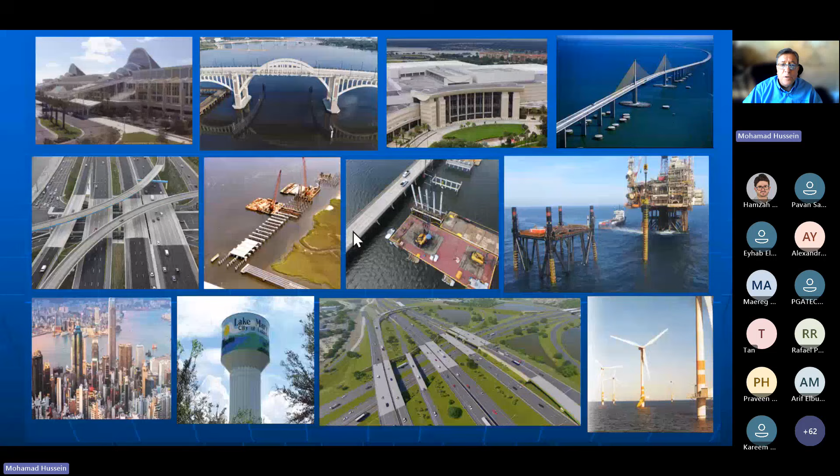Deep foundations are used to support all types of structures and all kinds of geotechnical conditions, for a variety of reasons, to resist all types of load combinations. They can be divided in a variety of ways.

I will divide them today into driven piles, and there is a manual from the United States government that can be downloaded in 3 volumes in PDF format. This manual for the design and construction of driven pile foundations was actually written by engineers from my company, GRL Engineers. This is a website where it can be downloaded from. At the end of the presentation, I will give you my email address, so if you are interested, please email me and I will send you a link to download this manual.

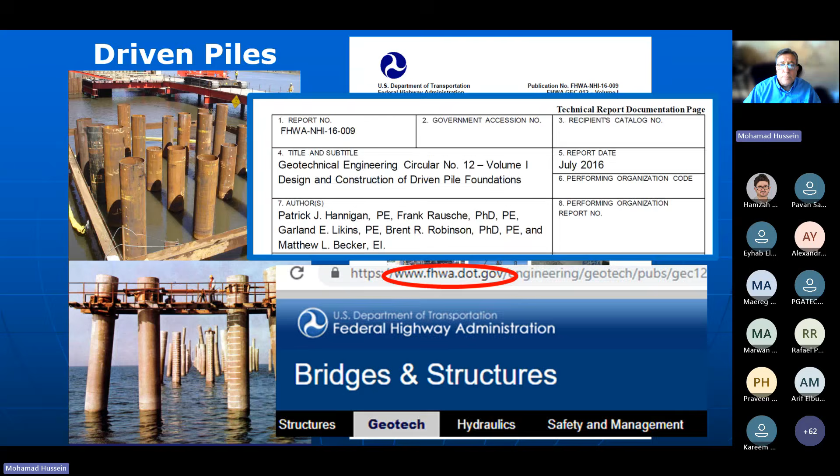I will also talk about bored piles, for which there is also a manual from the United States government you can similarly download. And I will also mention Auger-Cast in-place deep foundation piles, for which there is also a manual of design and construction.

Deep foundations have been used for a long, long time, particularly driven piles, which were mentioned by the ancient Greek historian Herodotus 2,500 years ago. We now have buildings and structures that are hundreds of years old founded on foundations still using the same piles. In today's practice though, those piles were, by the way, timber piles for thousands of years.

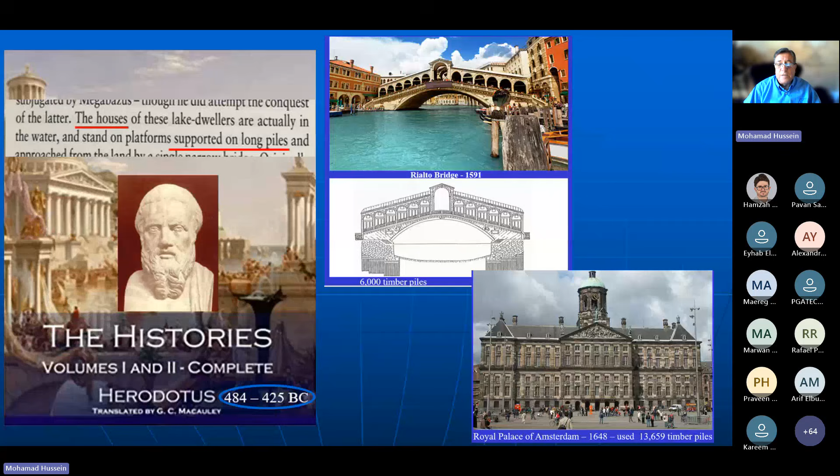In today's practice, driven piles consist of steel piles and concrete piles. And there are literally hundreds of different hammer models that are used to install these driven piles.

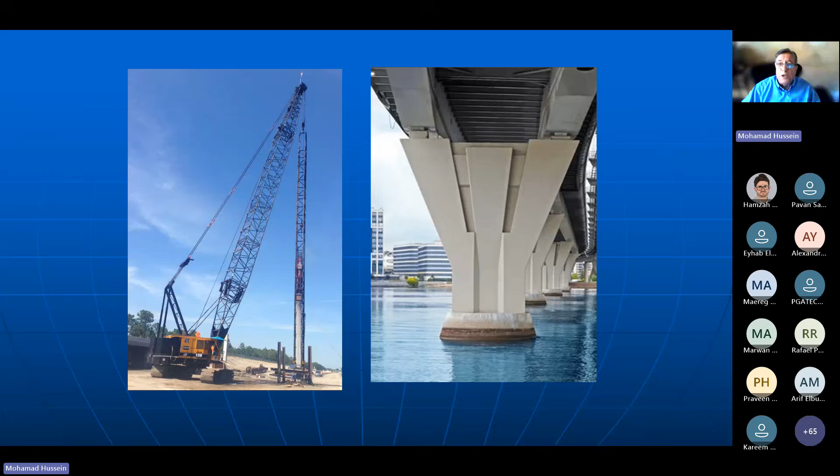So we drive piles individually, typically in a pile group, to form a deep foundation to support a bridge pier or a building.

During the driving, the pile encounters dynamic pile driving resistance. However, to support a building or structure, we need to know its static load-bearing capacity.

The best way to evaluate a pile's static load-bearing capacity is to perform a static load test, for which we need to pile up dead weight as a reaction for a hydraulic jack that we put on top of the pile and load it.

We plot the applied load and corresponding movement of the pile top, incremental load and corresponding incremental displacement, to establish this relationship between pile top loading and pile top movement.

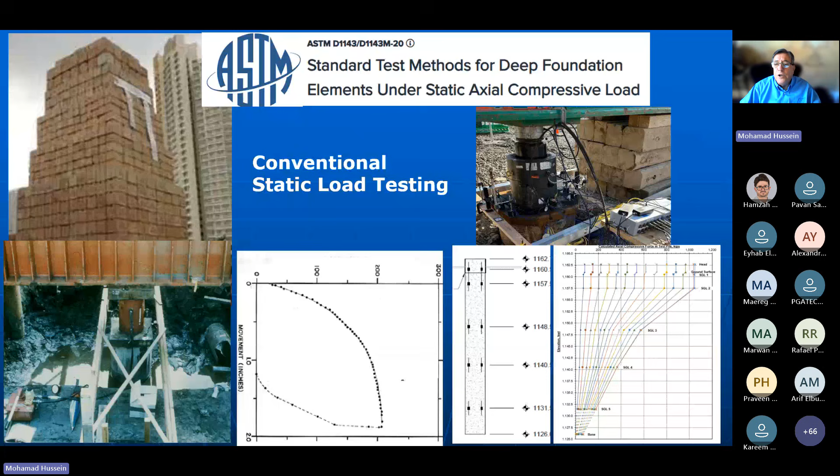It is always advised to also install strain gauges along the length of the pile during this static load test, in order to establish the forces in the body of the pile under the applied load, which allows us to evaluate the friction resistance and end-bearing capacity of the pile.

So although it's the best thing we can do to evaluate static load-bearing capacity, static load testing has limitations: cost, since it costs a lot of money; time, since it takes a lot of time to perform; and safety, since these tests involve very high loads.

So let's look at the dynamics of pile driving and try to see if we can use that information to evaluate the static load-bearing capacity of the pile.

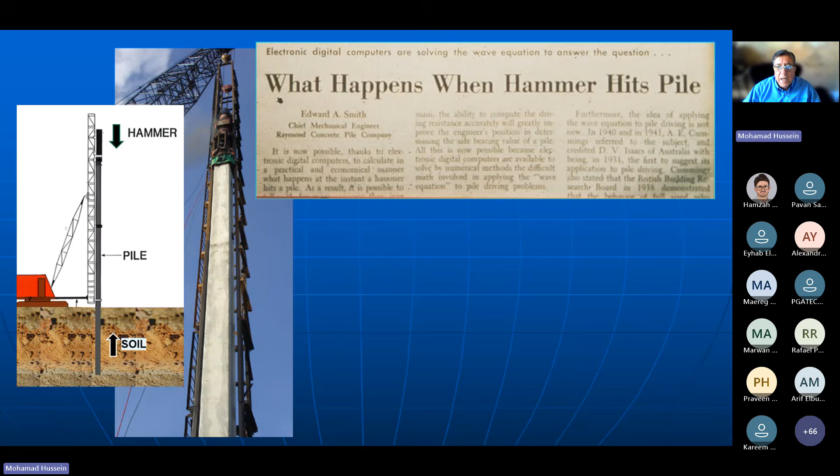A very smart engineer called Mr. Edward Smith in Texas, realizing that the dynamics of pile driving is best evaluated by stress wave mechanics, one-dimensional elastic wave propagation, wrote a computer program called Wave Equation Analysis of Pile Driving.

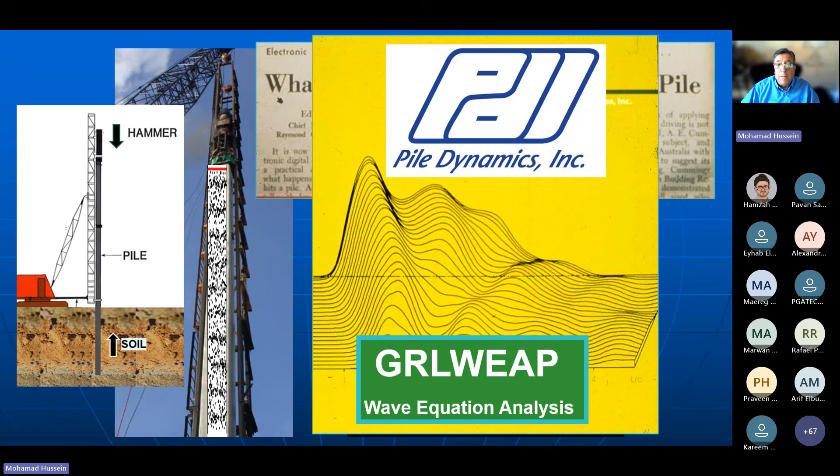The United States government commissioned a group in Ohio, our group, GRL Engineers, a long time ago in the 1970s, to write a wave equation program for public use. This program, now the commercial version, is available from Pile Dynamics, by the same authors of the original WEAP program, called GRLWEAP.

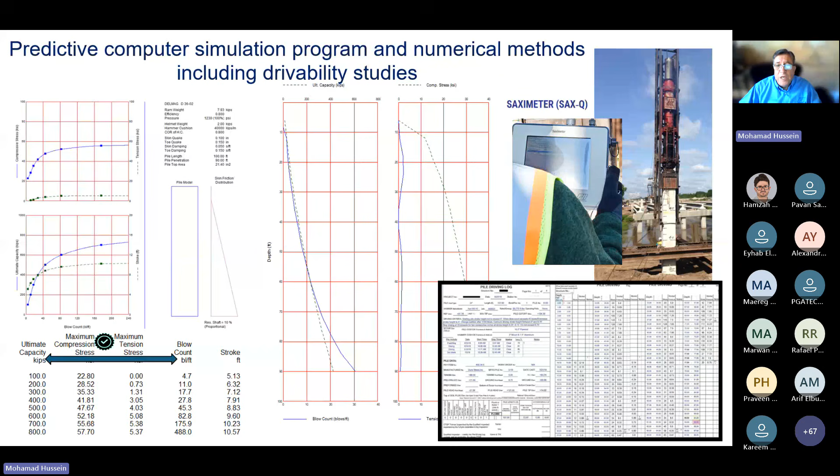Wave equation analysis is a very powerful simulation program that uses numerical methods to evaluate the static load-bearing capacity of the pile based on its driving resistance. This establishes the relationship between pile driving blow count and static load-bearing capacity, which the inspector can use for quality control and quality assurance, to make sure every pile is driven to the required blow count to achieve the required design ultimate capacity.

However, being a simulation program, it requires assumptions to constitute the model being analyzed. Because of the need for these assumptions, there are potential sources of error in the results—one must not only be knowledgeable in the different assumptions and parameters needed to constitute the model, but quite frankly, one also has to be a little bit lucky to hit on the right assumptions to use.

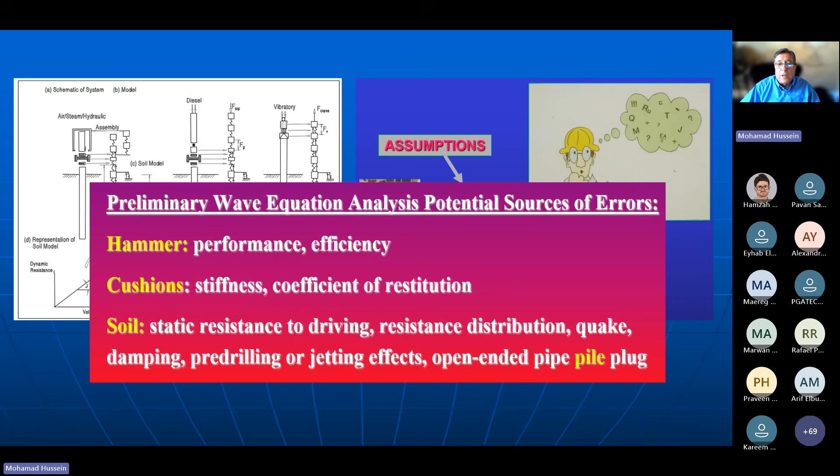So instead of assumptions and simulation analyses, let's now talk about measurements. Instead of assuming parameters, let's go on the job site and measure what we need to know, analyze these measurements, and come up with the results we seek.

The idea of these measurements was established at Case Western Reserve University in Cleveland, Ohio, in a research program that lasted 12 years, sponsored by the Ohio Department of Transportation, the United States Federal Highway Administration, and a number of other highway departments.

The research program was headed by Professor George Goble, he's the one standing up in the lead, assisted by students Dr. Frank Rausche and Garland Likins.

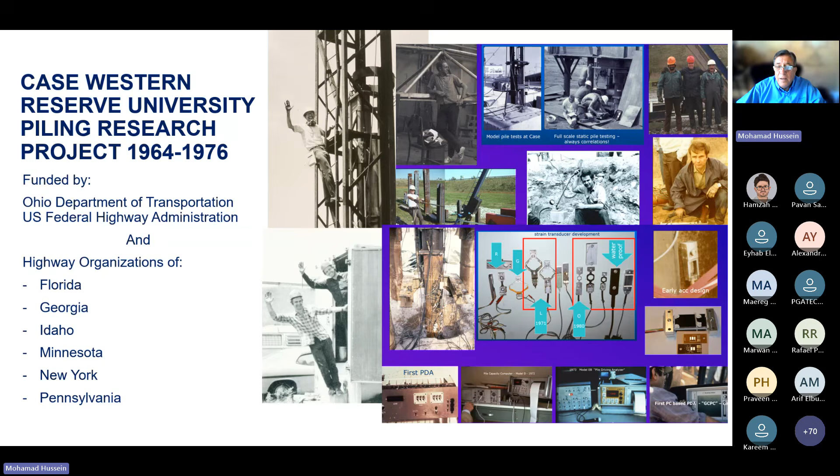During that period of time, not only did they invent the sensors needed for the dynamic measurements under the impact of the hammer, the sensors were invented, the computer to analyze these sensors was also invented, as well as the science and engineering needed to analyze these measurements, including the formulas and equations required to extract the static load bearing capacity of the pile from the measurements of dynamic resistance under the hammer blow during pile installations. These measurements and analyses are now used worldwide, utilizing the pile driving analyzer known as PDA and the CAPWAP signal matching computer analysis program available from Pile Dynamics.

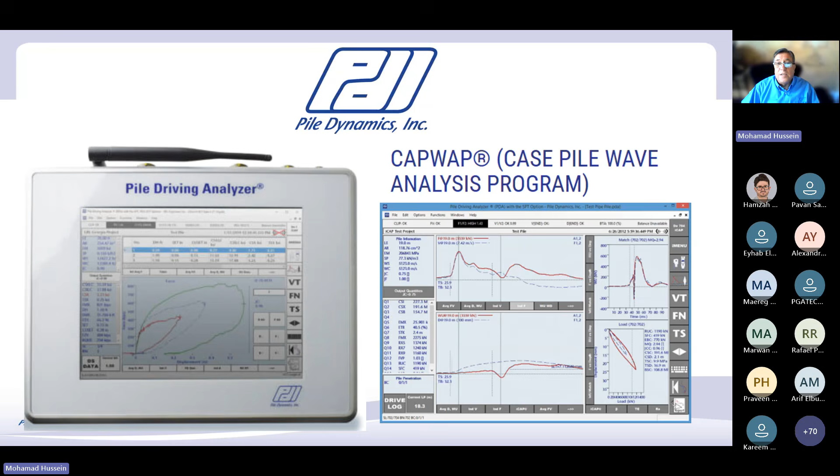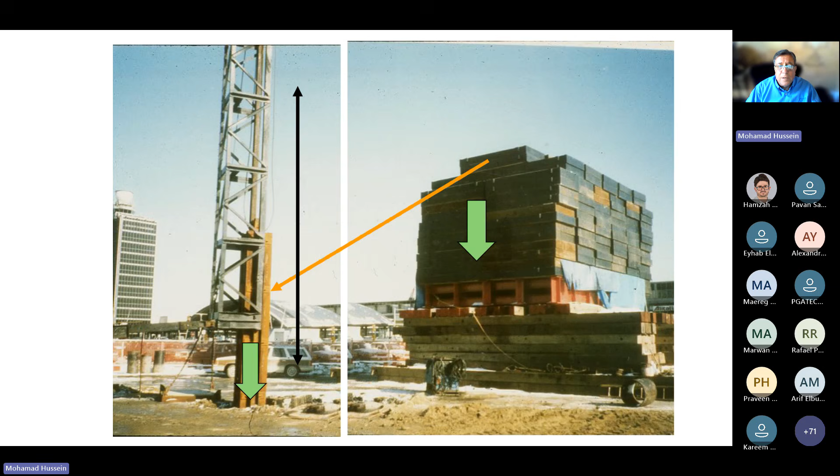What if we were to think a little bit differently? What if I was to take a very small portion of this dead weight, a very small percentage of it, put it in a guide, lift it up high enough, and drop it in such a way that it will produce the same load on the pile as all of that dead weight? I can engineer that. I can figure out how heavy the weight should be, how high it should be dropped, so I can produce the same force on the pile dynamically as all of that static load test.

That is basically the difference between a static load test and a dynamic load test. All I have to do now is use the hammer itself, because the hammer is dynamically loading the pile. The hammer is pushing the pile to the ground, impacting it. So the impacts of the pile driving hammer in the process of pile installation become the dynamic loading itself. All we have to do now is put some sensors on the pile and take measurements during pile driving.

This process has been standardized by ASTM standard D4945.

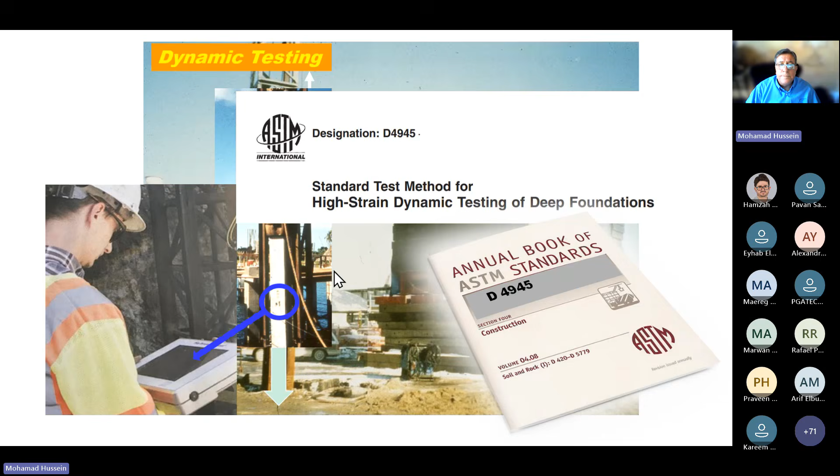So dynamic load testing, therefore, is nothing but the measurement of load and movement of the pile under the impact of the hammer, and analyzing these measurements utilizing elastic stress wave mechanics.

The load is measured with a strain transducer, the one on the left-hand side of the photo, and the motion, the movement of the pile, is measured with an accelerometer shown on the right-hand side of the pile. These are very small instruments, 3 inches in length, about 10 centimeters, that are bolted onto the pile during pile driving.

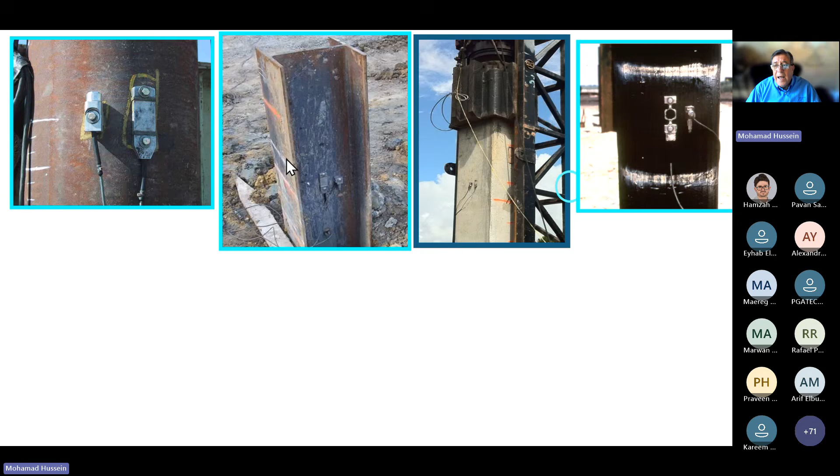These can be bolted into all types of piles, driven piles, steel, concrete, even timber piles, as well as cast in situ deep foundations, such as bored piles.

So when the hammer impacts the top of the pile, a stress wave is generated that moves down the pile length. Once the front of that stress wave approaches the sensor locations, which are 1 meter below the pile top, then the sensors see or feel a sudden rise in the force and the movement of the pile. Then the stress wave goes by, continues on to the bottom of the pile, reflects from the pile end, and comes back, at which time the sensors feel it again.

So therefore, the strain gauge and the accelerometer, the sensors on top of the pile, will feel the initial impact of the hammer and the reflection from the pile bottom. This constitutes a test result of one hammer blow. This is a dynamic load test result, a dynamic signature of the pile under the impact of the hammer.

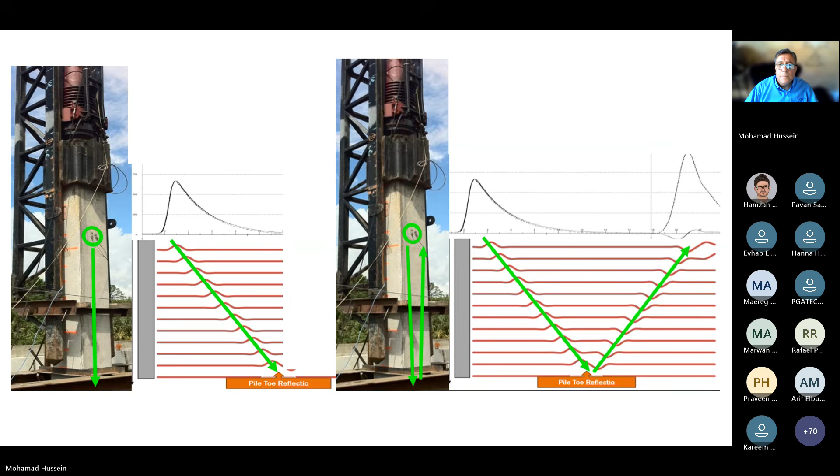Then we can group these blows per meter, or per foot, and show the results in graphical form to indicate the whole history of the driving of this pile. This is pile penetration depth.

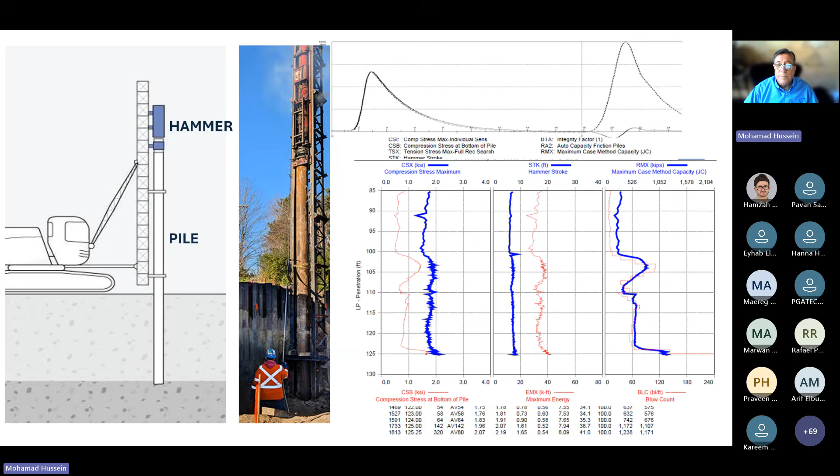So now we were able to extract the static load-bearing capacity of the pile versus penetration depth from the total driving resistance that is measured by the sensors. This information can be used to evaluate the entire system, including the hammer, pile, and soil.

During pile driving, it is very important to have a handle on the efficiency of the driving system, because the pile driving blow count is not only a function of the resistance of the soil, it is also affected by the efficiency of the hammer.

The best way to evaluate the efficiency of the hammer system is by measuring the energy that reaches the pile top. How much do you think is the ratio of energy that the pile top receives as a function of the maximum rated energy of the hammer, percentage-wise?

So the question is, why does it vary so much? And why is it so low on average? That is because it depends on the mechanical efficiency of the hammer, the state of its maintenance condition, and the condition of the cushions that they put inside the hammer to protect it, and the cushion on top of the pile in the case of concrete pile to protect it. Because all of these reasons put together, in addition to the reaction of the soil, the elasticity of the soil, and so on, will play into the efficiency of the system.

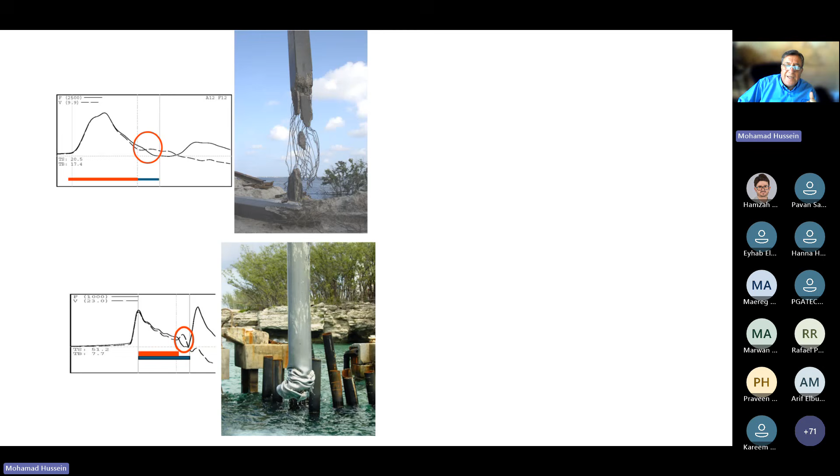During pile driving, the pile experiences all types of driving stresses, including compression, tension, torsion, bending, etc. Should there be any damage on the pile during pile driving, that damage sends back wave reflections that are also registered in the data on top of the pile as an early reflection.

As we can see in these cases, an early reflection in the data indicates damage in a concrete pile. Similarly, an early reflection in the data showing damage in the bottom of the steel pile.

The stress at the bottom of the pile during pile driving, if we drive a pile to end-bearing resistance, could potentially be twice that on the top of the pile, because the stress on top of the pile is only from the hammer impact. That compression stress from the hammer travels down the pile length. If there's a lot of end-bearing resistance, also in compression, they both add up at the bottom of the pile.

So the measured data at the pile top allows for the assessment of the integrity of the pile, an assessment of its integrity condition, whether it's a crack or a complete damage, and the location of that damage along the pile length for each and every hammer blow.

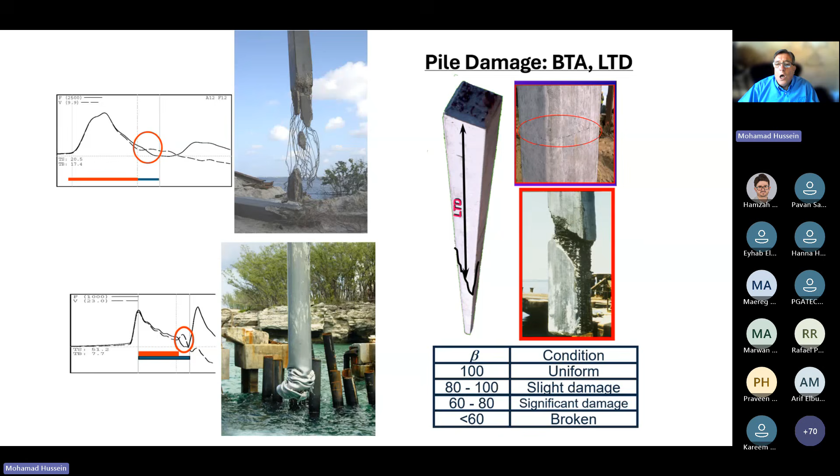So we talked about hammer performance a little bit and pile performance. Now let's talk about the soil resistance performance, soil resistance and pile static load bearing capacity assessments under the dynamic load of the hammer.

When the hammer impacts the top of the pile, it forces the pile into the ground. That movement of the pile activates soil resistance. These soil resistance forces also send back wave reflections. So now we have basically two waves in the pile: a compression wave from the hammer going down, and another wave coming up the pile from the soil resistances.

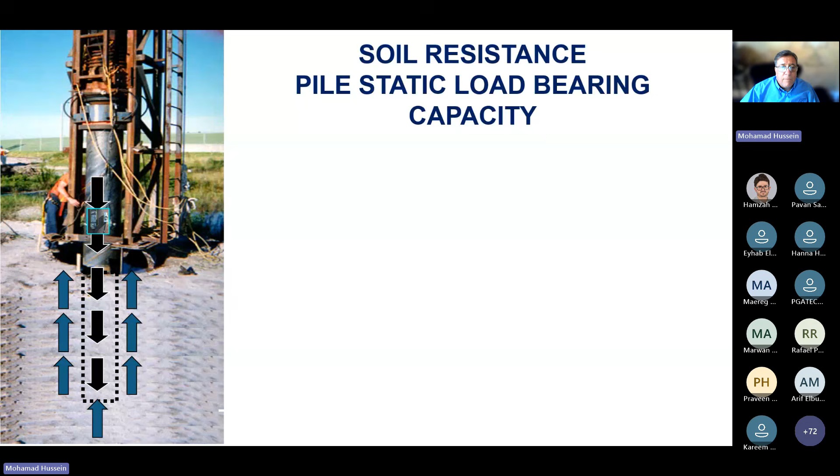From these measurements at the pile top, the PDA registers both waves going down the pile from the hammer and the waves going up the pile from the soil resistance forces. These measurements at the pile top, knowing the wave going down the pile and the measured wave going up the pile, also allow us to establish a reference showing whether we have no resistance like very early driving or whether we have shaft friction resistance along the pile length and how much end bearing resistance we have.

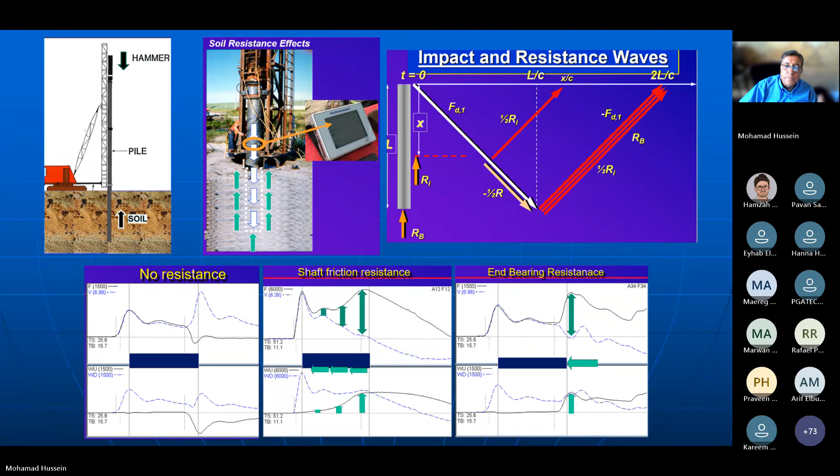We can use a computer program, CAPWAP, on the data obtained by the PDA, utilizing numerical methods to separate the dynamic resistance from the static resistance. So we have derived the static load-bearing resistance from the measured data using signal matching techniques.

Measurements of the dynamic effect under the impact of the hammer with the PDA, and corresponding CAPWAP analysis on these measurements, allow us to simulate the static load test result. Remember, we started by saying the best thing you can do is a static load test to establish the relationship between pile top load and pile top movement. Now we can simulate that result from dynamic measurements using numerical analysis techniques.

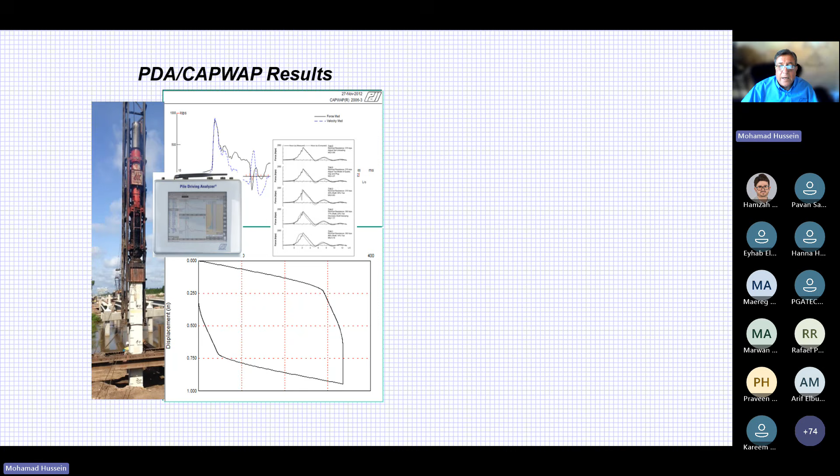So how good is that? How does that compare to actual full-scale static load testing?

Over the last 50 years, there have been many studies worldwide, many publications, sponsored agency reports and correlations showing that if the data quality is good and the analysis is done properly, one should expect excellent correlation between the results of a dynamic load test and a full-scale static load test. This is one case published by the American Society of Civil Engineers as a Class A prediction, meaning dynamic testing was done by one authority, static load testing by another, and the results were independently compared by the owner, in this case the highway department.

There's another case also published in the ASCE showing excellent correlation. There have been many such studies; I'm only showing you two published by the American Society of Civil Engineers.

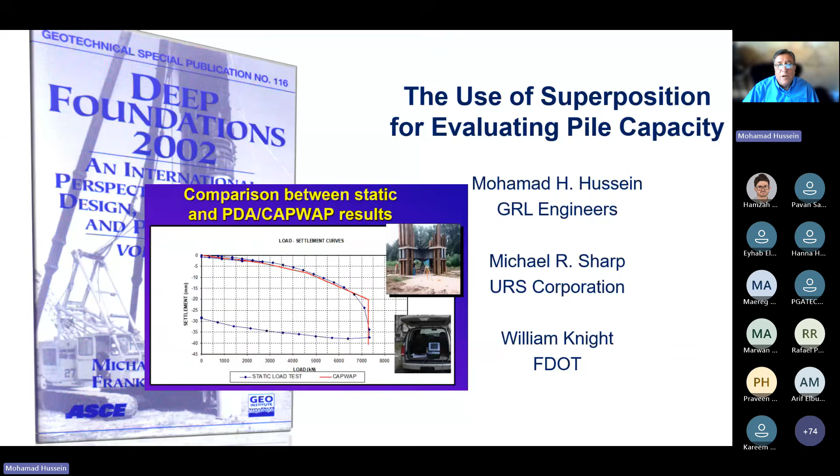This dynamic testing is typically implemented on project sites through a test pile driving program, where the engineer selects a number of piles to be driven and dynamically tested. The purpose is to establish production pile length for the remainder of the job, establish pile driving criteria, and check the engineer's design assumptions and the contractor's equipment, means, and methods. This is the standard conventional way of applying dynamic testing on a driven pile job.

However, lately some projects alternatively drive all production piles with 100% dynamic pile testing using the PDA, with or without a test pile driving program. This is now the required procedure in at least Florida in the United States, where every project with pile driving for the State Highway Department must be 100% tested.

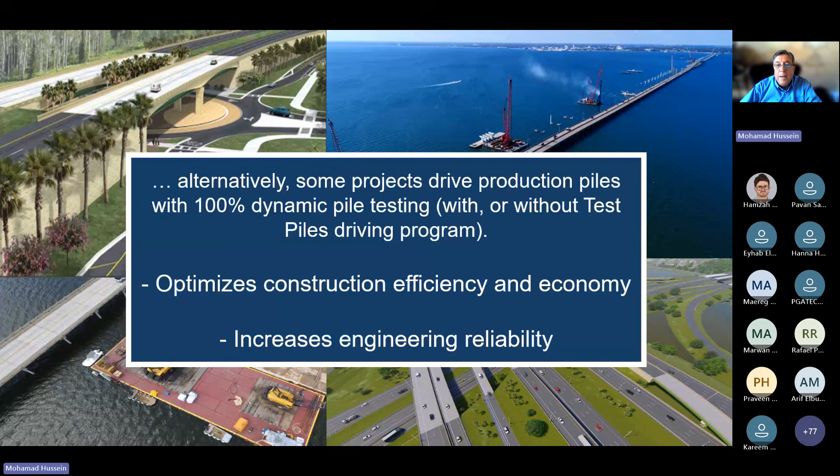They found that this procedure optimizes construction efficiency and economy, making the job actually go faster and less expensive than otherwise. It also increases engineering reliability. If the design engineer knows that each and every pile has been tested and verified for structural integrity and load-bearing capacity, the engineer can design with a much lower factor of safety, or a higher phi factor in the LRFD process, making the job much more efficient and economical.

So we talked about driven piles as an introduction. I know most of your projects are bored piles, but this is how dynamic pile testing started. It was later applied to cast-in-situ foundations, including bored piles.

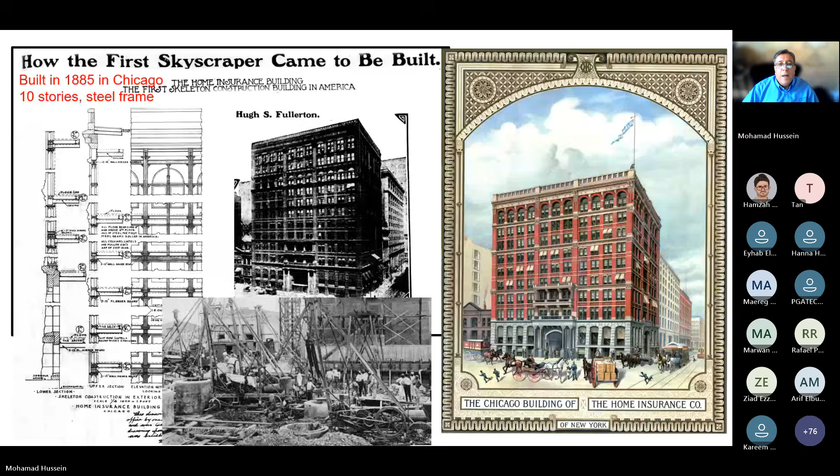The very first high-rise building in the world was built in Chicago in 1885. That is where deep foundations were first needed to support these high-rise buildings, the skyscrapers. The high-rise building phenomenon started in 1885 in Chicago, utilizing hand-dug deep foundations. They used to actually send people down all the way to bedrock to dig these foundations by hand.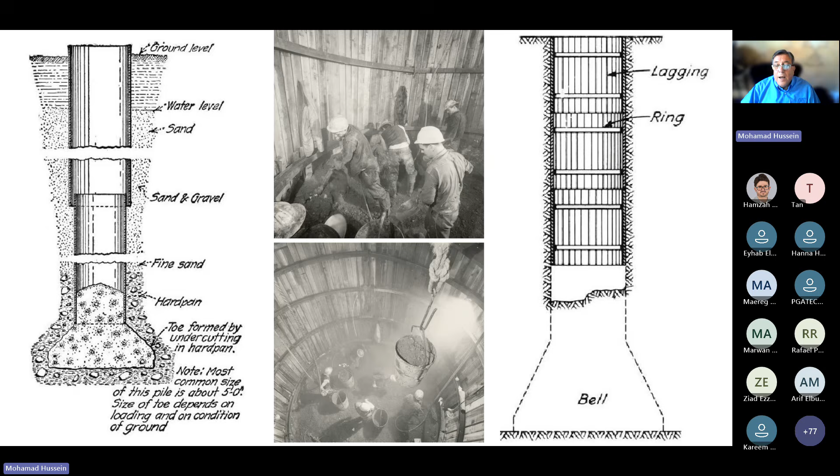To be sure, the design engineer and everybody involved went down these deep foundations, 50 to 70 feet in the ground, about 25 meters. The design engineer would go down there and check, actually holding meetings at the bottom of these dug piles. Of course, we don't do that anymore.

The use of mechanized bored piles actually started in Texas in the 1930s as an outgrowth of oil exploration. When they would drill to explore for shallow oil and found none, they decided to put a steel cage inside that hole, pour concrete in it, and make it into a foundation, in the 1930s. Then the Texas Highway Department was the very first to utilize that method of deep foundation support for bridges, in the 1950s.

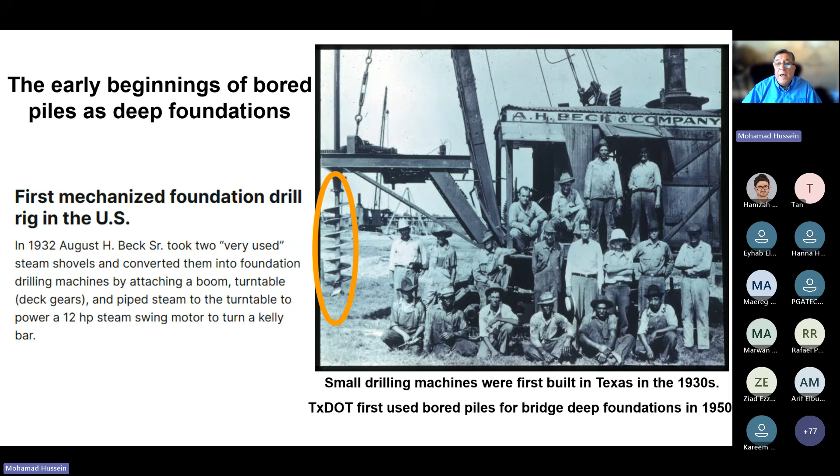If we happen to be lucky enough, as many of you are, and the water table is very low, then the construction is relatively simple. We just drill a hole in the dry, look down it for easy inspection, then put the steel cage and pour the concrete in there.

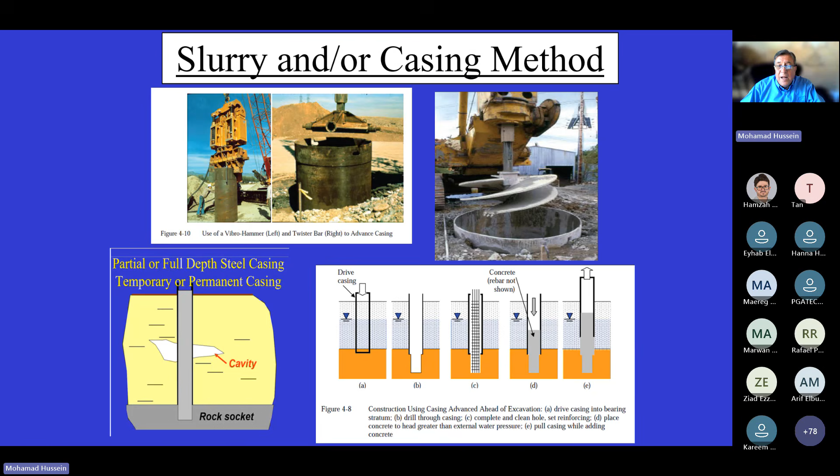However, when the water table is high, we have to employ other means and methods, such as the use of steel casings, temporarily or permanently in place, and or slurry. The purpose of the slurry is to introduce a fluid into the hole that exerts hydrostatic lateral pressure to keep the wall of the hole in place while we construct the drill shaft, so that soil does not fall into the hole as we are constructing the shaft.

We know that hydrostatic pressure is equal to density times depth. We know the depth, which is the depth of the drill shaft or the bored pile. So we have to design the slurry with the proper density to provide the required stress, the required pressure against the wall of the hole.

So we have to introduce materials into that slurry, into that fluid, including sand, for example. That is why we have to test the slurry to make sure that the sand does not end up at the bottom of the hole, affecting the end-bearing resistance of the drill shaft. Also, the materials inside that slurry should not form a mud cake on the side of the wall that would affect the friction, and therefore the geotechnical load-bearing capacity of the shaft. So it's very important to exercise proper sampling and proper inspection of the slurry during construction.

Then we have to introduce the concrete. We do that from the bottom up using this tremie pipe. It's a very long, funnel-like pipe with a hopper on top. We put it all the way down to the bottom of the hole, put concrete in the hopper, and lift it up. Of course, it has to always be inside the concrete. We cannot breach it, otherwise we're going to have a problem with the integrity of the shaft.

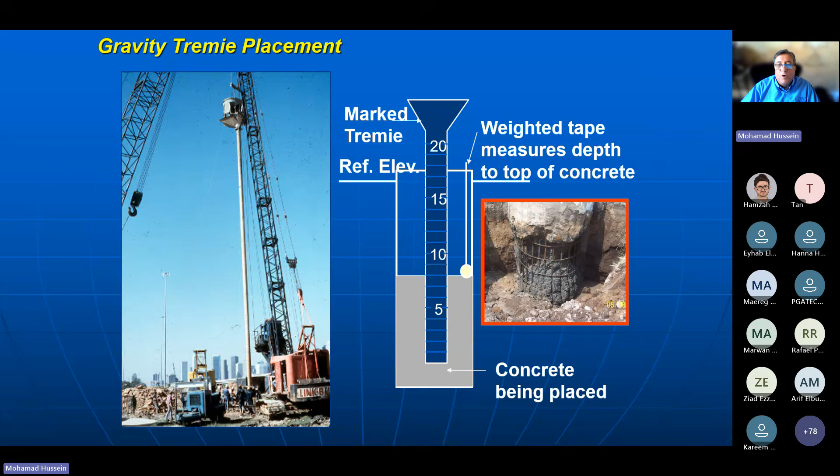So concrete will not flow through the steel cage, so we will have a problem with the integrity of this particular bored pile.

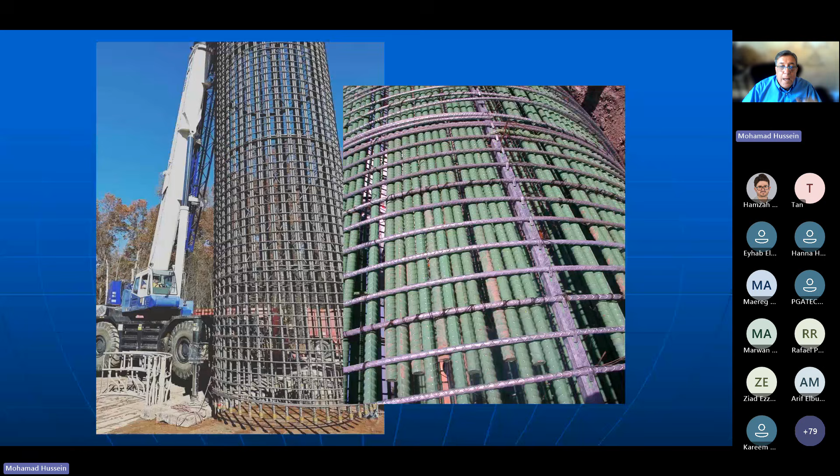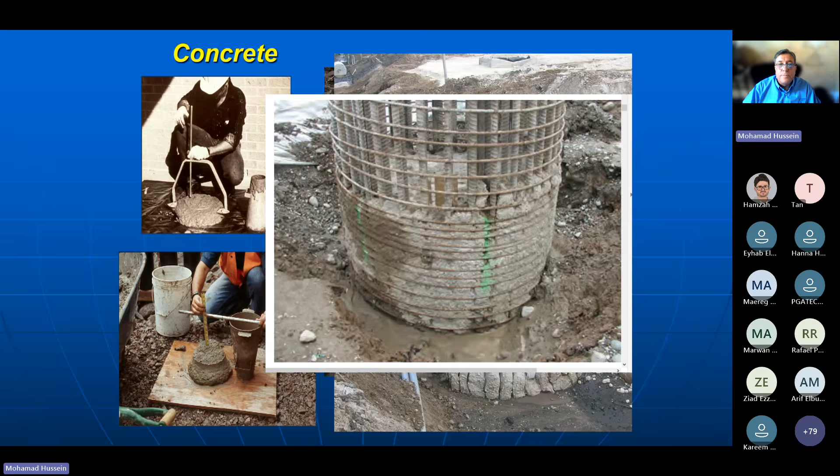So when we drill the hole, we have to perform a series of inspections, including checking for the verticality of the hole, the plumbness of it. Remember, we are drilling a hole deep into the ground, 25, 30, 40, even 50 meters. It has to be plumb with very tight tolerance of verticality—1%, 2%, maybe a maximum of perhaps 4%. We can't even see down there, but we have to make sure that it's plumb.

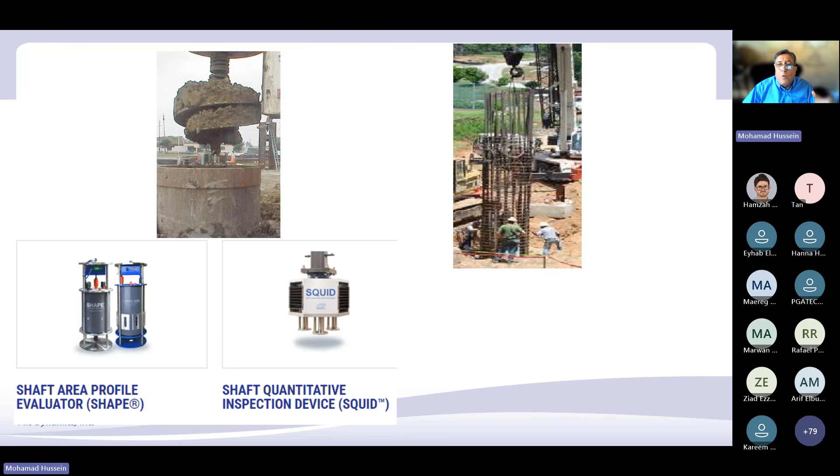We also have to make sure that we have a good hole profile, so we have to test for that. Furthermore, we have to evaluate the bottom cleanliness and competency of the material at the bottom of the hole. All of that is done before we put the steel cage in and before we pour the concrete into that hole to make the drill shaft in place.

The shape and verticality are checked with this newest equipment called SHAPE. It is sent down and up the hole, even inside slurry. It sends signals out and waits for reflections, and draws out the shape of the hole and the profile of it versus depth and the verticality of it.

It also calculates the volume of the hole and shows us the offset between the bottom and the top of the hole. Every one of these components is important. The volume of the hole matters because later on we can compare the volume of concrete actually used to make this shaft to the volume of the hole when we checked it before introducing the concrete.

The bottom of the hole cleanliness and competency is checked with this newest equipment, quantitatively called SQUID, Shaft Quantitative Inspection Device. It has three little probes, penetrometers, that are pushed into the bottom of the hole, and they register the stiffness, the strength of the material, and the thickness of it to make sure it meets the design requirements. I propose that utilizing such quantitative assessments of the bottom of the hole can fundamentally

change the design of bore piles by potentially reducing the depth of the rock socket. The reason the depth of the rock socket is so conservative is because of the uncertainty associated with the condition of the bottom of the hole as far as cleanliness and competency. But if that was established for each and every one of these holes, I believe one can minimize the depth of that rock socket in the design and construction of these bore piles.

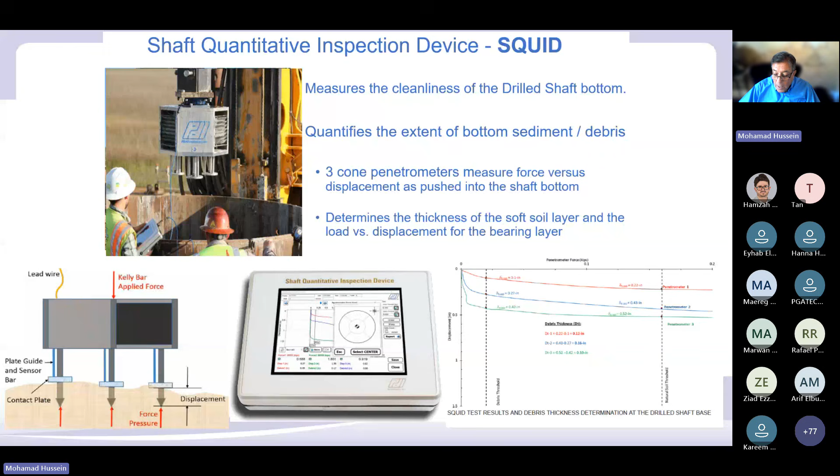This is the most expensive portion of the construction of the foundation: drilling through that rock in order to achieve the required rock socket depth. If we can minimize that, that would be ideal.

So we do all of the inspections we can, and we pour the concrete, and the constructed shaft may be perfect, cylindrical, the proper size, as designed, as envisioned, or it may be a little bit off. Well, okay, it's off, but it's good enough maybe. But sometimes it's very bad. So now we have to worry about the integrity of the shaft and assessment of it.

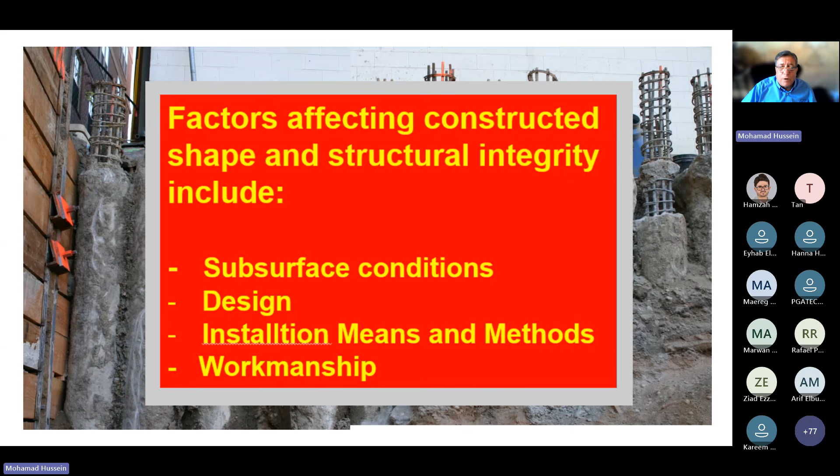There are many factors as to why we may have these issues with the integrity of the shaft, having to do with subsurface conditions, the design. I mentioned the reinforcing cage, I mentioned the concrete. You can also get into other aspects of it: the installation means and methods, the slurry I mentioned, workmanship, inspections. So there are many reasons why we may have integrity issues with these cast-in-situ bore piles, because we're constructing something way out of sight, way underground.

The manuals I mentioned have many chapters having to do with the construction, drilling, and casing practices that cause various types of defects.

There have been many studies undertaken throughout the United States and worldwide as to how much defects are in these shafts. I think the general view is that about one third, 20 to 50%, of all shafts have some kind of an issue, some kind of a defect or a minor fault.

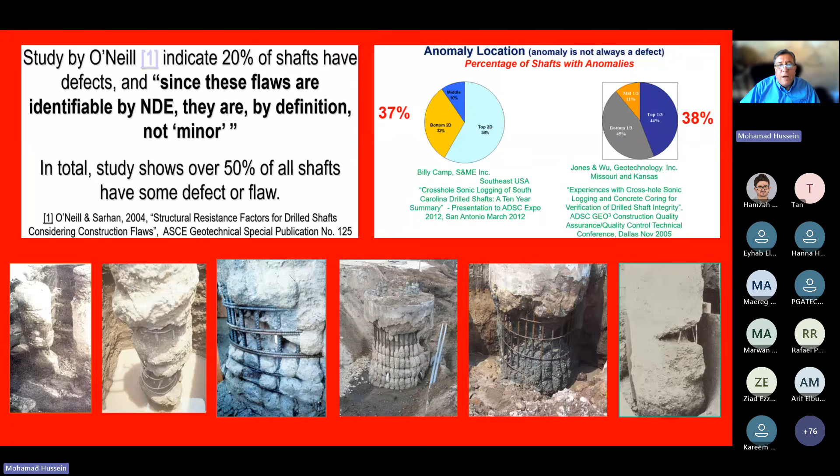The easiest, most expedient, least expensive, and I may say least reliable method to test for integrity is PIT. This technology is about 50 years old. When this technology came into play, it was the only thing around. So it was wonderful, it was great at the time 50 years ago.

It has its ASTM standard, D5882, and it basically relies on the measurement of the pile top reaction to low strain impacts on top of the pile and reflections from the pile bottom.

So the engineer here is performing this PIT testing by hitting the top of the pile with a hammer, and by the way, different hammer weights ought to be used for each test, and an accelerometer on top of the pile measures the motion of the pile top.

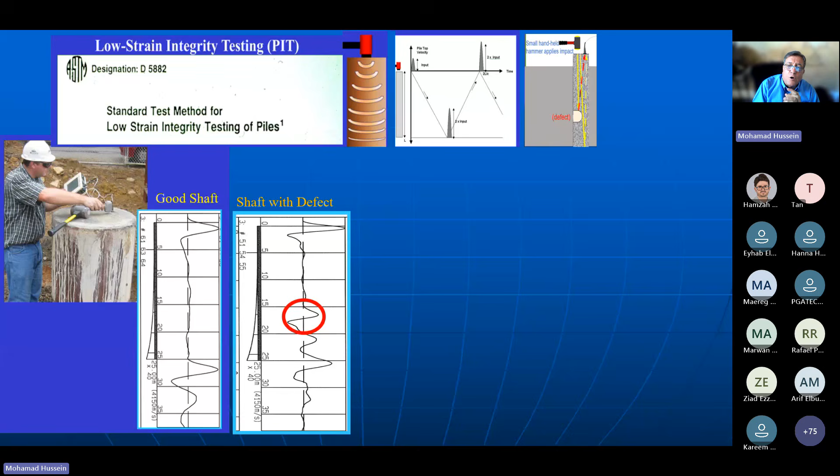The data here shows the impact and then the reflection from the pile bottom. So this is good-looking data, good-looking shaft. This, on the other hand, shows data from a shaft with a defect, because it has an intermediate reflection at 15 meters while the full length of the shaft is 25 meters. So this reflection in the data indicates that something had caused it. From the characteristics of that reflection, we know that's a defect.

We can then use signal matching techniques on this PIT data in order to quantify, as much as possible given certain conditions, the amount and location of this defect on the shaft. The equipment used worldwide, probably the most used worldwide, is the PIT equipment available from Pile Dynamics. We sell PIT equipment worldwide, but this testing method has many limitations.

I will need a whole hour to just go over the capability and limitations of this method. Needless to say, it has many limitations. It's the oldest and very old legacy technology.

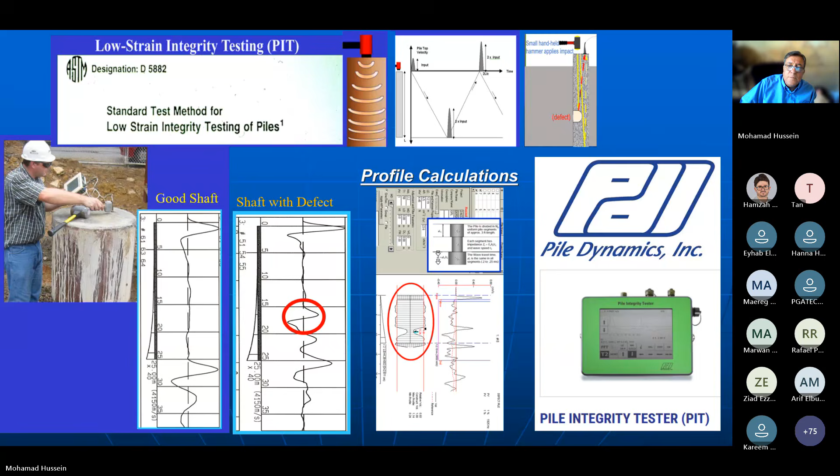Then came the CSL, cross-hole sonic logging testing of drill shafts, that addresses some of the limitations of the PIT testing method, but not all of them. To perform CSL testing, which is ASTM standard D6760, we need more equipment. We need to install 1.5-inch access tubes into the shaft when we make it, so we have to pre-plan for the test.

The number of access tubes needed equals the diameter of the shaft in feet, or 30 centimeters. So for every 30 centimeters of shaft diameter, we need one access tube. A 5-foot diameter shaft needs 5 access tubes. Then we need transmitting and receiving sensors that will be sent into these tubes, a depth encoder to know where these sensors are, and the CSL computer itself on the job site. The engineer has to be present on the job site to perform this test.

This testing is done as follows: we take these access tubes 2 at a time and scan in between them. By the way, these access tubes must be filled with water at the time of concreting, because we want to use the water as a radiator of energy during the curing of the concrete. Otherwise, we may have debonding between the access tubes and the concrete, causing a problem with the test. That is why we need these tubes filled with water. Very critical.

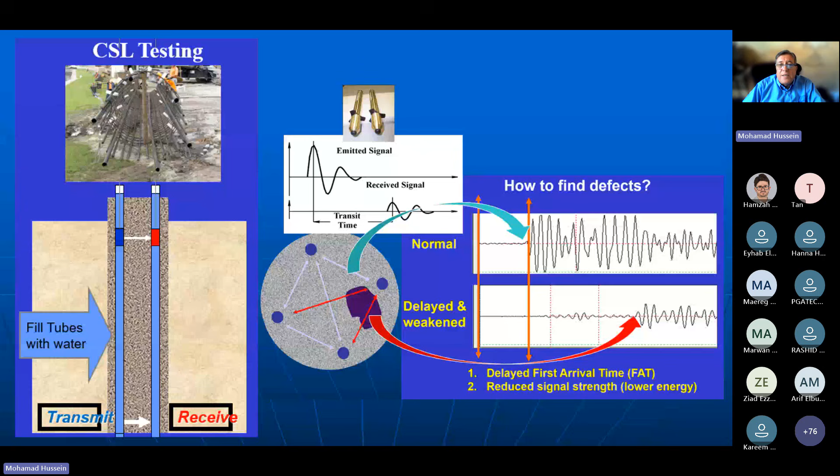Again, this test is performed worldwide with equipment available from Pile Dynamics.

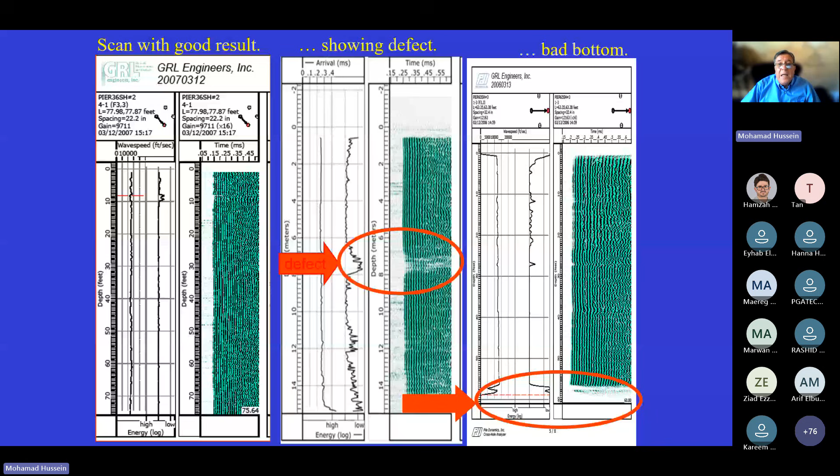On the left-hand side, we have a good scan between these 2 tubes. On the middle one, however, between those 2 tubes, we may have an issue in the shaft in the middle, because we have a loss of signal there. Another test shows a loss of signal at the bottom. So between those 2 tubes on this shaft, we have a defect at the bottom, what's called a soft bottom on this particular drill shaft. This is basically how the CSL results are generated and how they are typically evaluated.

Then all of this data can be put into a 3D tomography program that shows the location of defects along the length of the shaft inside the steel cage and in the quadrant - how much it extends into the area of the shaft. That's very important, because if the design engineer wants to evaluate a defective shaft, they will know where the defect is and its extent. Furthermore, if the contractor wants to drill down to core and fix the shaft, they will know where and how deep to go. So it's a much improvement over the PIT method, obviously.

However, it has its own limitations as well. The shaft will have to cure sufficiently enough - it may take 4, 5, 6, 7 days to cure before this test procedure can be applied. Meanwhile, the contractor cannot really use these shafts for anything for a week or so.

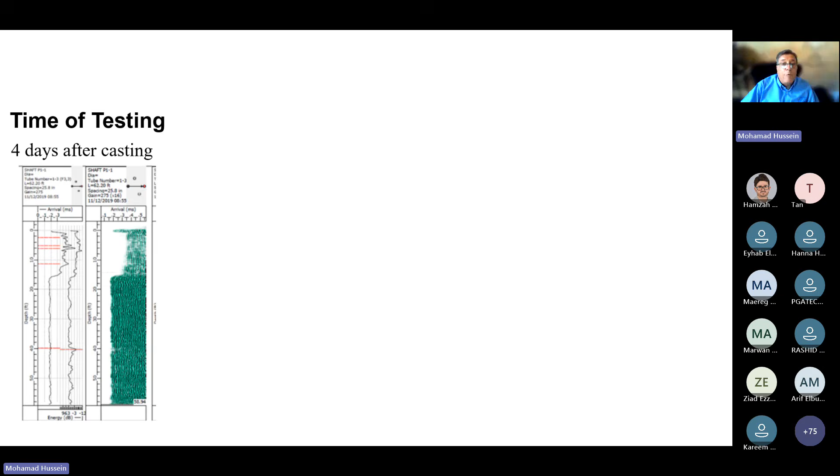Sometimes we may have debonding for various reasons between these little access tubes and the concrete inside the shaft, which will produce bad data and therefore bad test results.

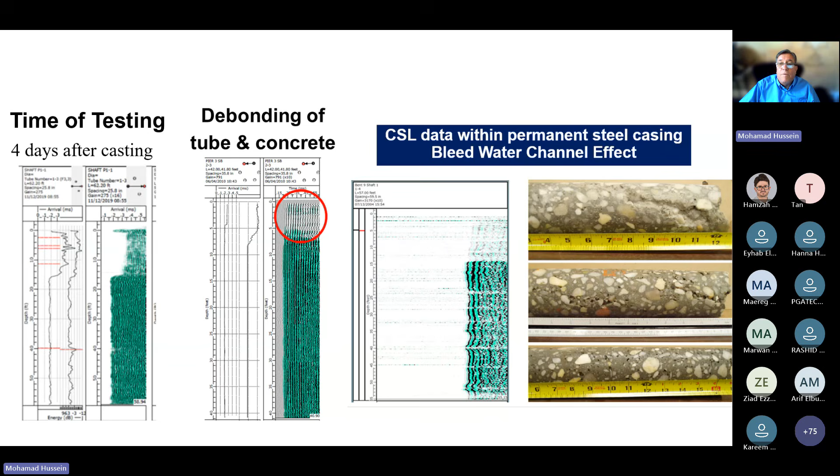If we have a steel casing being used to construct this bored pile, that will cause issues with the CSL results for the following reason. When we have a steel casing in the shaft, the concrete, when it consolidates under its own weight, you'll often notice that if you go a day or two after the shaft had been cast, you'll see a pool of water on top of the shaft. That is because the concrete had consolidated downwards under its own weight, and the water, not being able to seep sideways because of the presence of the steel casing, has to go up. It goes up in what's called bleed water channels. These little bleed water channels will affect the CSL signals, but not the integrity or the strength of the concrete in the shaft. So because of all of these reasons, we may have bad CSL results for no reason related to the integrity of the shaft.

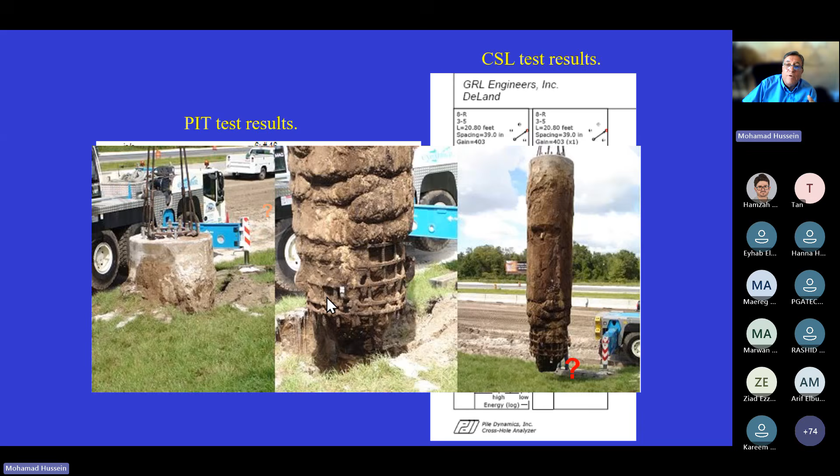The newest technology in the assessment of the integrity of bored piles in place is thermal integrity profiling, TIP, ASTM standard D7949. This method relies on measuring the temperature of the concrete in the drilled shaft during curing, because during curing the cementation, the hydration process produces heat. The idea is to measure the temperature of the shaft, which is typically twice that of the surrounding soil, so it's completely distinguishable from the surrounding soil. Measuring the temperature during the curing process would be done within the first 24 to 48 hours of casting, depending on the size of the shaft.

For a perfectly shaped shaft, we should have perfectly uniform temperatures. These temperatures are measured by thermal wires strung along the longitudinal reinforcing steel bars, with a measuring device every half meter or so. The number of thermal wires attached to the reinforcing cage is equal to the diameter of the shaft in feet. So every 30 centimeters of diameter, we will have one of these wires, meaning a 5-foot diameter shaft will require 5 of these wires.

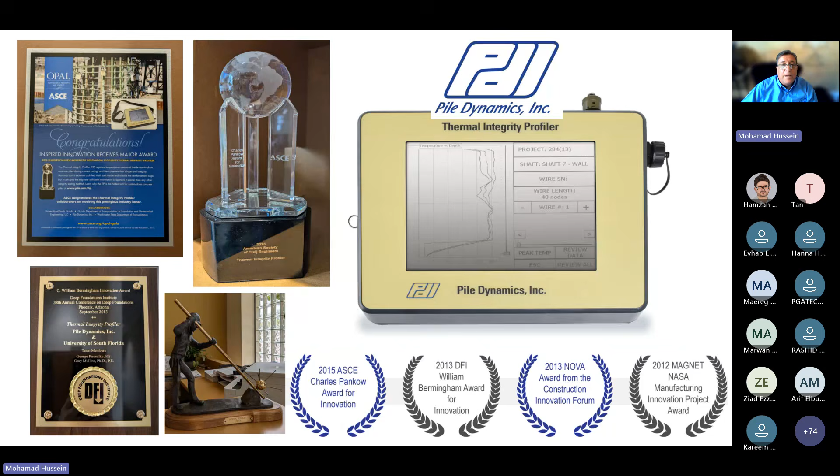This type of technology has won numerous innovation awards from ASCE, from DFI, and even from NASA for the use of temperature readings to evaluate the integrity of concrete in place for drilled shafts and deep foundations.

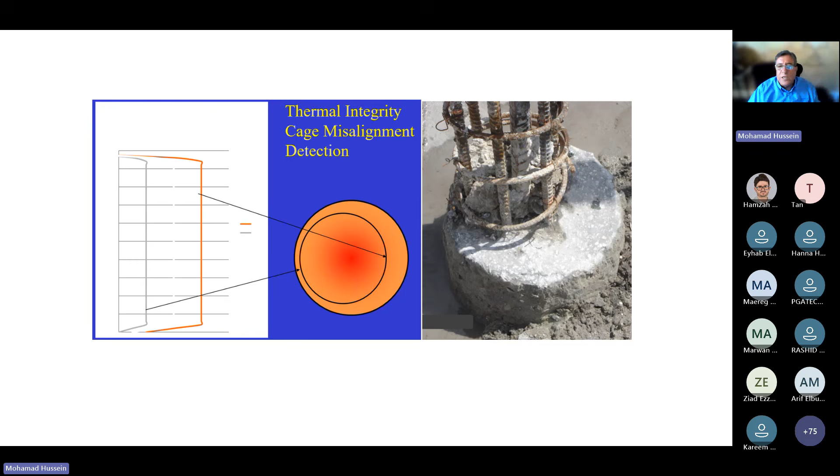Furthermore, if we compare schematically the two opposite temperatures along the shaft length, we see that consistently one side is hotter than the other. That means the reinforcing cage had shifted inside the concrete, inside the bored pile, because the side showing higher temperature is closer to the middle of the shaft where it's hottest, and the cooler side is closer to the soil where it's cooler. So from these temperature measurements with the TIP method, we're able to establish the shape of the concrete and the location of the steel inside the concrete body.

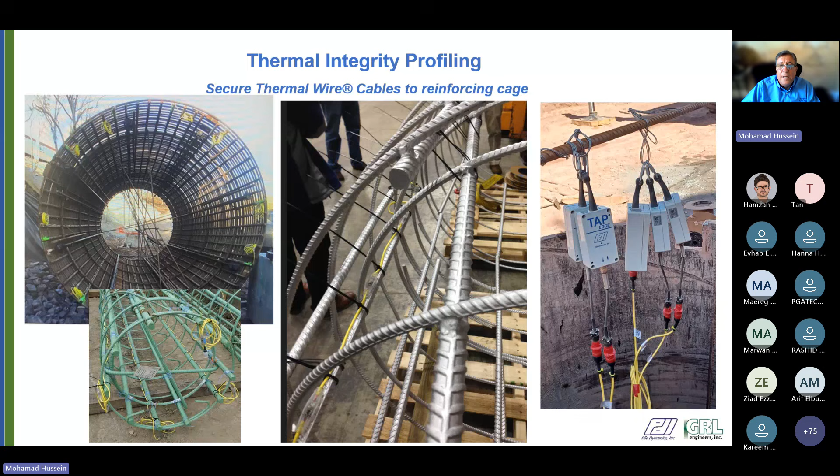The testing is done with no need for the engineer to be on the job site. These thermal wires are sent to the job site, and the contractor can simply zip tie these wires along the length of the reinforcing bar, put the bar in the hole, pour the concrete, and go on normally constructing the shaft. No engineer is needed on the job site. The data is sent automatically through the cloud to the office, so the engineer, inspectors, the contractor, or anybody on the job site can be monitoring this data through the cloud. No need to be on the job site, automatically done.

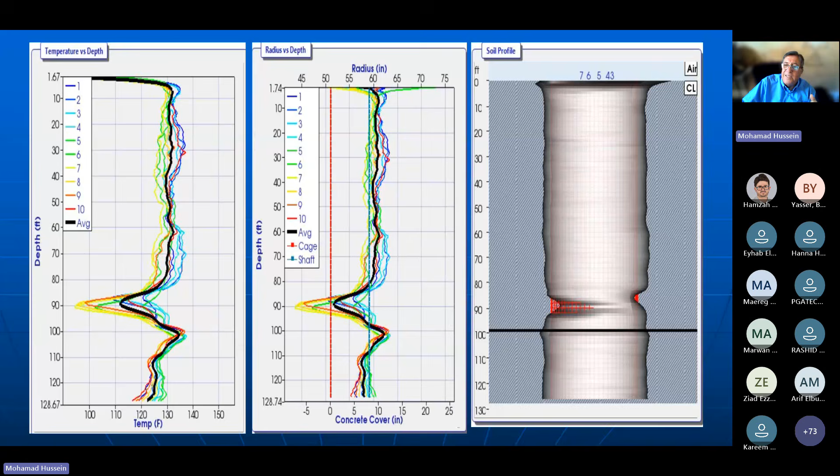Then we use this math to transform the measurements of temperature into equivalent concrete volume, therefore concrete radius, and location of the steel inside the concrete of the bored pile. This is another example of temperature measurements versus depth, also showing the result in 3D of the concrete shape and the location of the steel inside it.

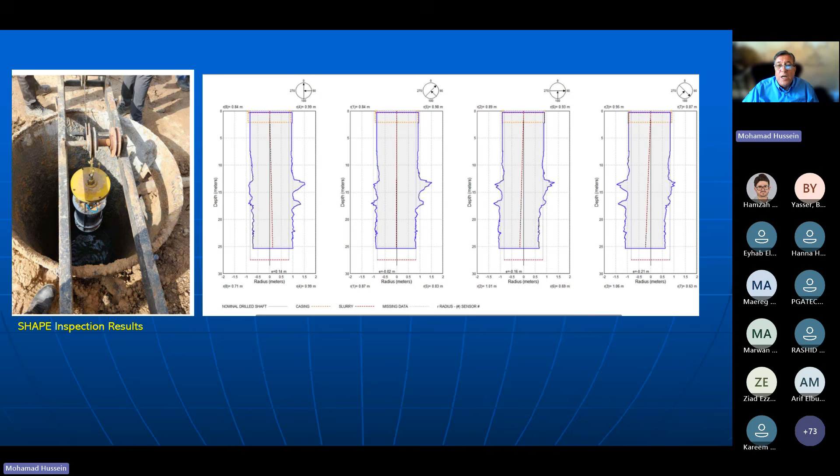These are various other results, just to show you examples. This is a case where the shape, remember, we can use to establish the profile of the hole and its verticality. These are the different results of the shape, and at the same time thermal wire was used for TIP testing, and this is the shape of the concrete inside that hole that we got from using the shape equipment, the profile. So they match very well. Of course, the thermal wire will not tell you anything about the verticality, but the shape equipment, the profile of the hole, will tell you its verticality and plumbness.

This is data showing a comparison between TIP and CSL results. There we see the reduction of temperature at the very bottom, and correspondingly the CSL results similarly show a soft bottom. So there's consistency in the findings between the TIP data and the CSL results.

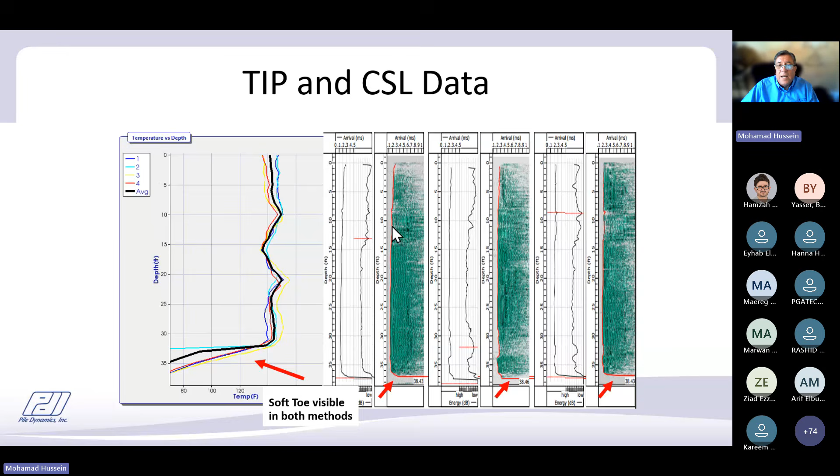This is another case, a project with many bored piles. They used thermal wire on the very first few piles and realized they had an issue -- a fundamental problem with the way they were constructing these shafts, which they found out early using the first 6 piles, because they could establish the integrity and see there was a systematic issue in the way they were constructing these piles within the first day or two of installation. Had they waited for CSL results, waiting a few days or a week, they would have constructed all of these shafts without even knowing they had an issue, and that would have progressed through the entirety of the project. So time is of essence, not only from a technical point of view, but also from a construction point of view.

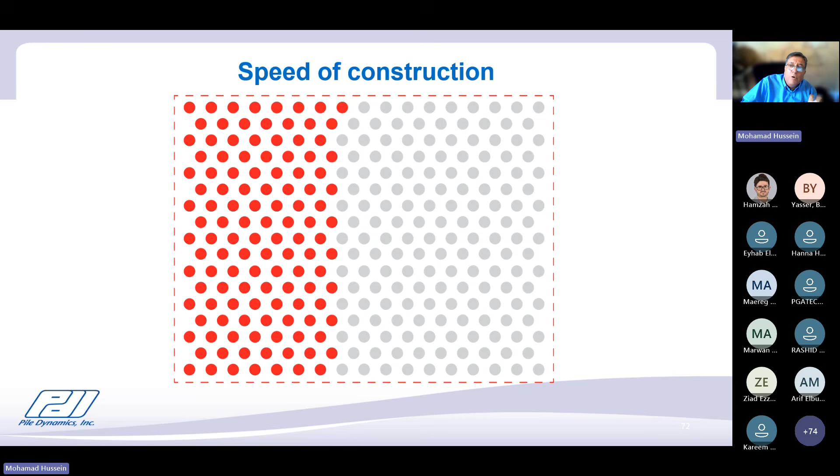The same technology of thermal integrity wires has also been used on barrettes and diaphragm walls.

Comparison between TIP and CSL: TIP is a much more advanced method over CSL, with many advantages over the CSL test method. CSL is 35 years old. This TIP method is about 10 years old and still continuing to be developed.

Cost considerations between thermal wires and cross-hole sonic logging -- bottom line, it's about equivalent. When you take into consideration all of the aspects and all of the costs of performing either one of these two methods, you will find, as many have found worldwide, that it's approximately equivalent in cost.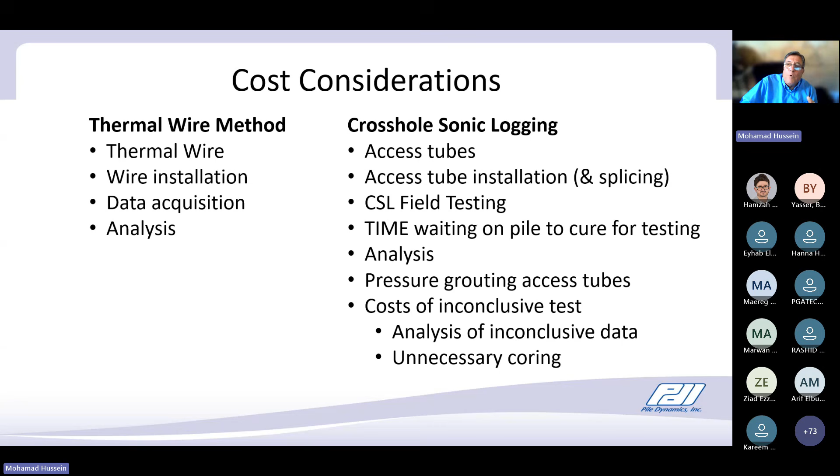This TIP method has now been used and specified in many states in the United States, also in the UK, Australia, New Zealand, and China. Worldwide, it's taken hold now, replacing the PIT and CSL methods, quite frankly.

So I talked about the low strain method for assessment of integrity. A small handheld hammer will send a stress wave that may tell us something about the integrity of the drill shaft or the bore pile, but nothing about load bearing capacity. To do that, we have to perform a high strain test.

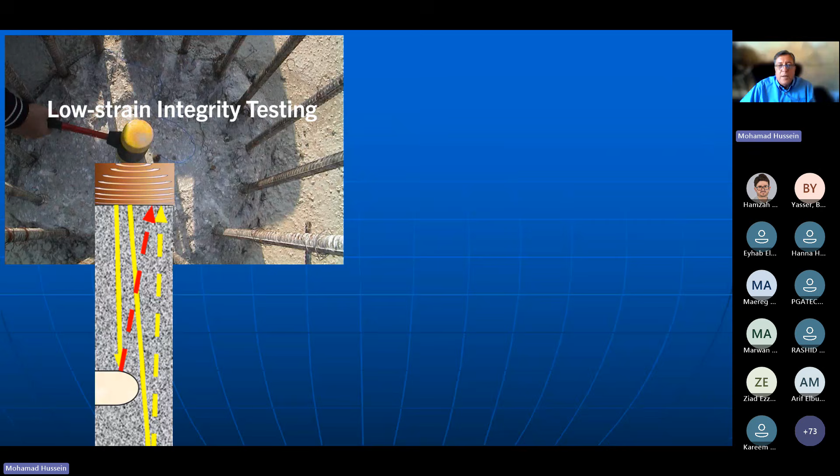To do that, we need a bigger hammer, big enough to move the shaft against soil resistance, to mobilize resistance in order to calculate or measure load bearing capacity. For that, we need to bring in a drop hammer to perform this test. The weight of the hammer is 2% of the load we need to test to. So if we're testing for 1,000 tons static load, we need a 20-ton hammer.

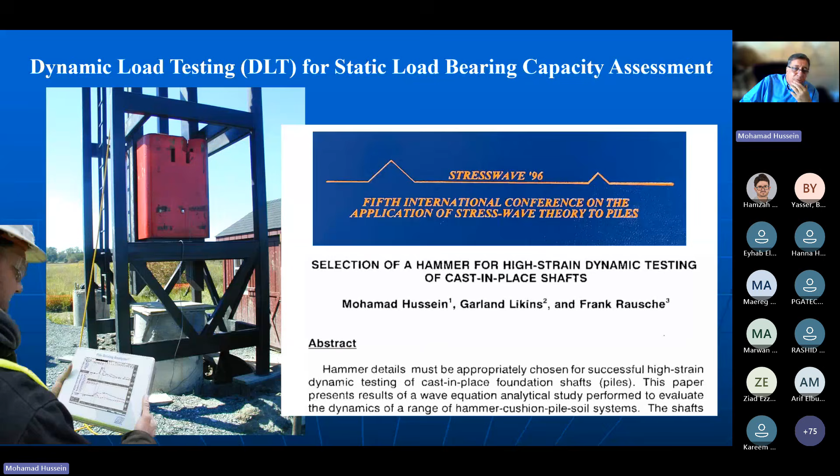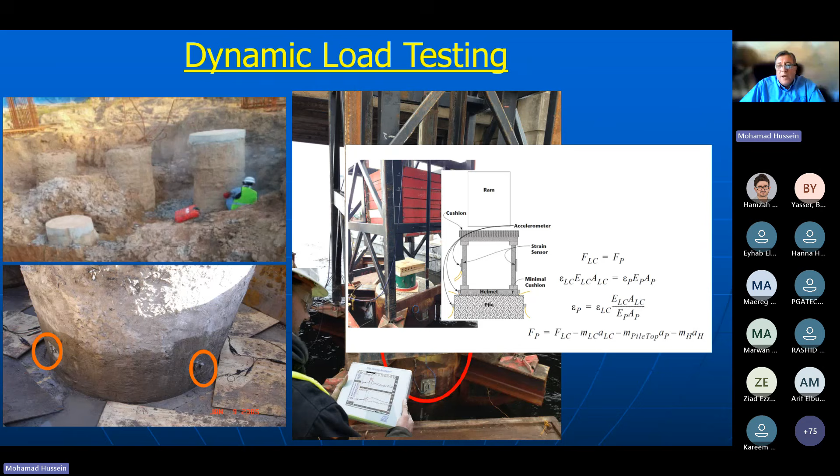This is what is now being recommended. There's formulas and math and science behind how we transform the results of this load cell into equivalent results on the drill shaft measurements themselves.

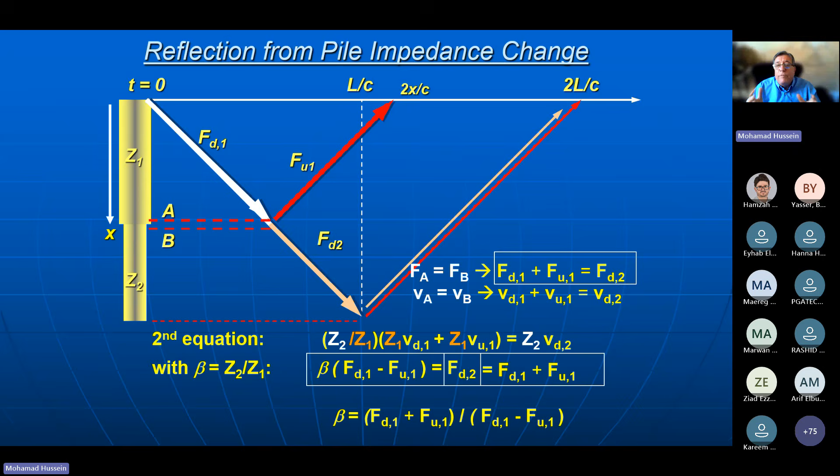So similarly, as with a driven pile, the same technology applies: we put the sensors on top of the bore pile, impact it with a drop hammer, and measure the wave going down the pile and going up the pile. Except now these waves include not only soil resistance effects, but also the non-uniform shape effects. For that, we need thermal wires.

So every bore pile that is static load tested should have thermal wire in it in order to establish the profile of the pile, allowing us to transform the readings of the strain measurements and analyze the data by knowing the profile of the pile itself, so we can concentrate on the resistance of the soil, because we know the shape of the pile.

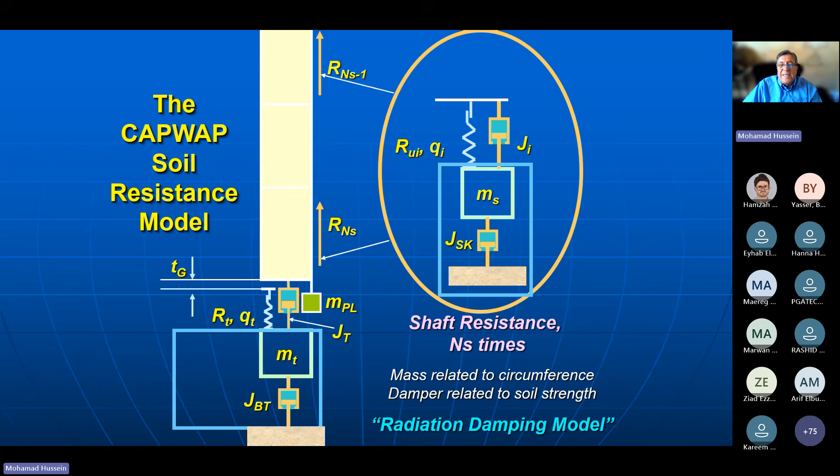So all of these reflections due to the non-uniform shape are accounted for in the modeling. The resistance wave up is concentrated on the soil resistance effects. That allows us to establish the static load test simulation at the pile top and the pile bottom. So this is a non-uniform shaft from the thermal wire profiling and the result of the dynamic load test.

Dynamic load testing should typically be performed with a few blows from the impact hammer, starting with low energy and progressively increasing to higher energy, measuring the displacements. So these are simulated static load tests for one dynamic load test utilizing 4 different hammer impacts.

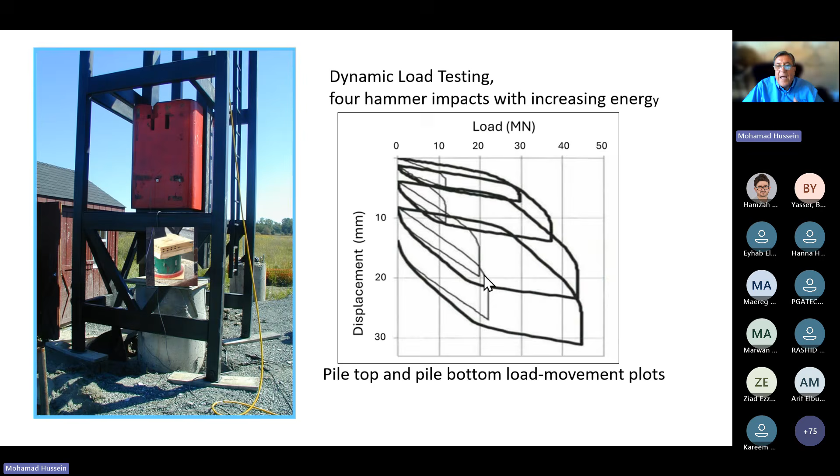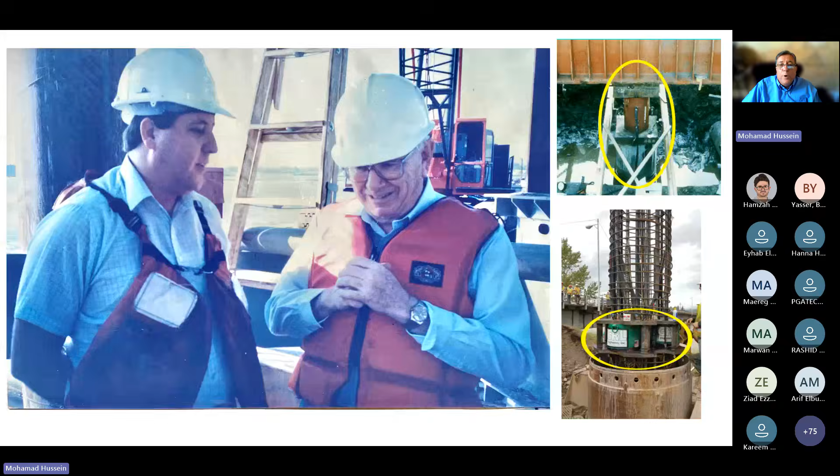About 30 years ago, a very famous professor, Professor Jorj Osterberg, came up with the idea that instead of putting that hydraulic jack on top of the bore pile, let's put it inside it. So we called it the O-cell. Except Professor Osterberg passed away and the patent that he had expired, so now we use it as bidirectional testing. We don't call it O-cell anymore—the only people who call it O-cell are the people selling O-cells. Otherwise, worldwide, and also according to ASTM, it's known as bidirectional testing.

So bidirectional testing is performed as follows: we put the load cell at the bottom, apply load, and measure the movement upwards and downwards. So we are loading the friction using end bearing as a reaction, and vice versa, loading the end bearing and using the friction as a reaction, until we reach maximum value.

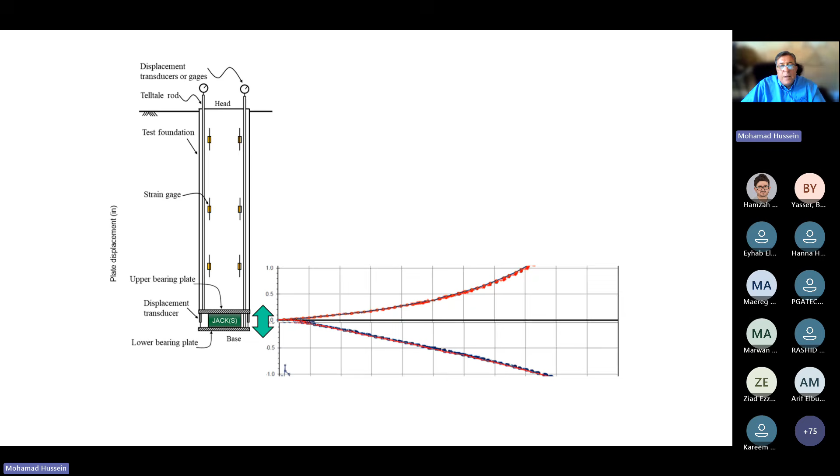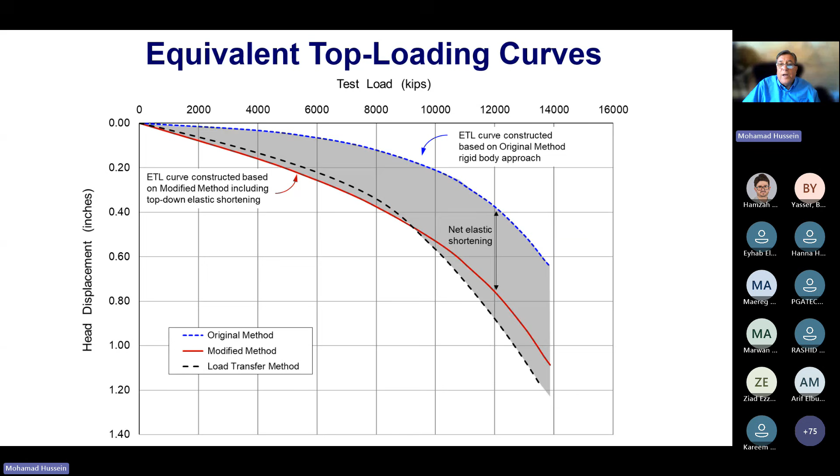From that, we can perhaps establish an equivalent simulated pile top loading, load versus displacement at the pile top from the bottom measurements. And depending on what procedure you use, you may have different answers because sometimes you take the elasticity into consideration, sometimes not.

So one has to be careful as to what method and the corresponding accuracy of it in doing that transformation from the measurements at the bottom to equivalent pile top. Sometimes we move the location of that load cell in the body of the shaft in order to optimize how much load we can utilize during this procedure. Of course, we can also put strain gauges, as we should, to measure the load in the pile and therefore get the frictional resistance along the pile length.

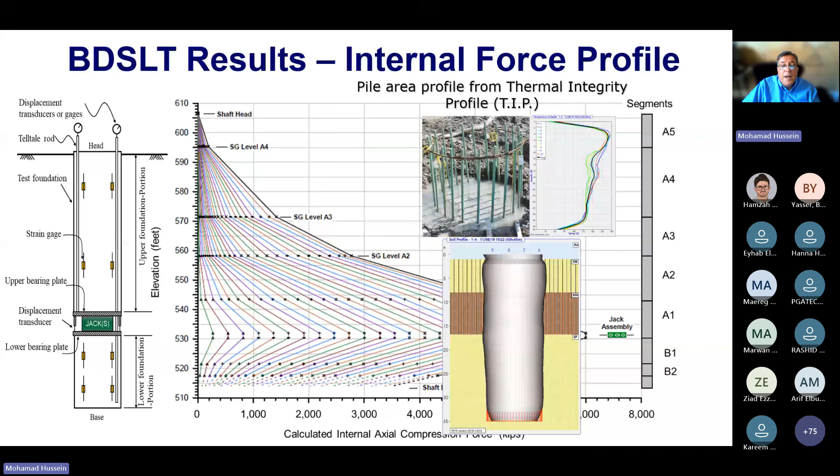For that, we should also utilize the TIP wire in order to establish the profile of the pile that will allow us to transform the measured strain into force and therefore into corresponding frictional load from the resistance of the soil. So whether it's a dynamic load test, a conventional static load test, or a bidirectional load test, one should always have this thermal wire in the bored pile in order to have the profile of the pile that is absolutely needed and required for the proper analysis of the data of these tests.